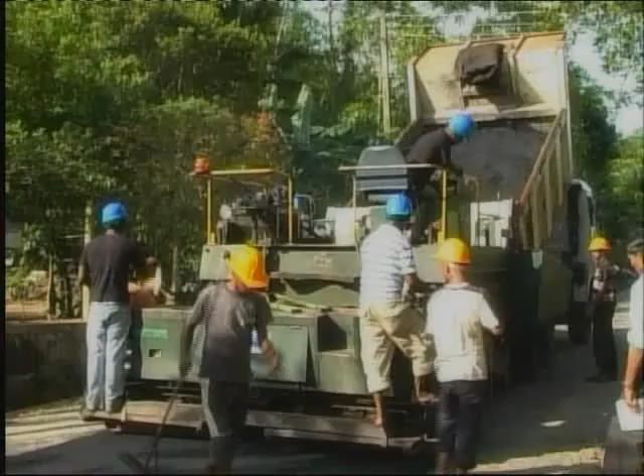KDA Weerasinghe and Company Private Limited is today one of the leading construction companies in Sri Lanka, having been in existence for over 20 years in the field of civil construction. We are a C1 category in the field of highways and have successfully completed several large road projects in Sri

Lanka. The project: construction of the road pavement of the Southern Transport Development Project, JBIC Section Package 2, Dodangoda to Kurundugahahetekma, from 54.52 kilometers to 66.44 kilometers. The client, Taisei Corporation. The consultant, Oriental Consultant Company Limited.

Cost. The estimated contract sum of the project was Rs 969 million. And at completion, the cost was Rs 1,041,680,844. Construction period. The original construction period was 15 months commencing from 26th December 2009 and ending 26th March 2011.

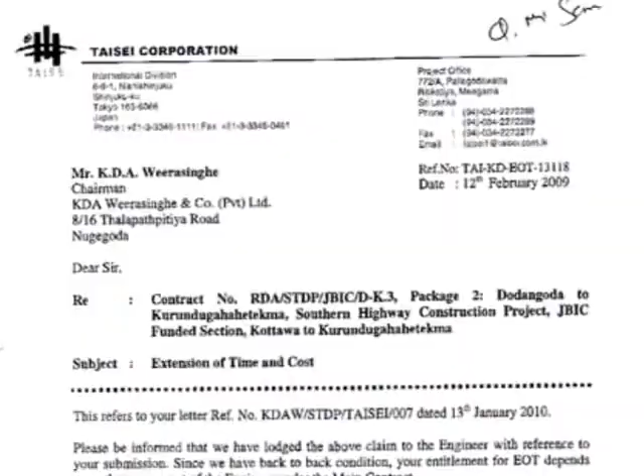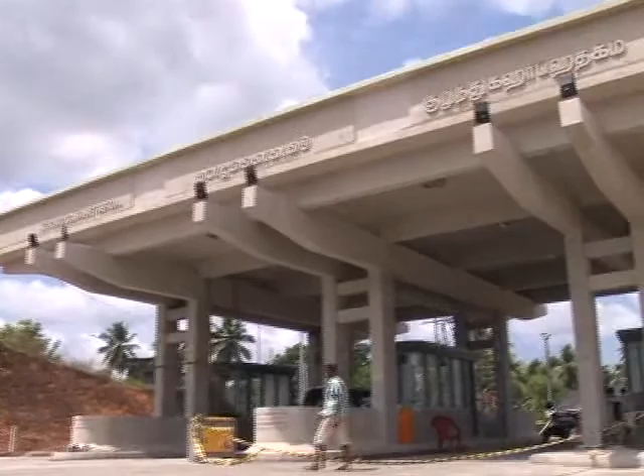However, with the additional work and approved time extensions, the project was completed on 17th September 2011. Pre-planning. Site location layout plan. The project was located from the bridge over the Benthara River to Kurundugaha interchange. The company was privileged to be the first domestic contractor invited by the main contractor, Messrs. Taisei Corporation, for the construction of the road pavement in the first expressway in Sri Lanka.

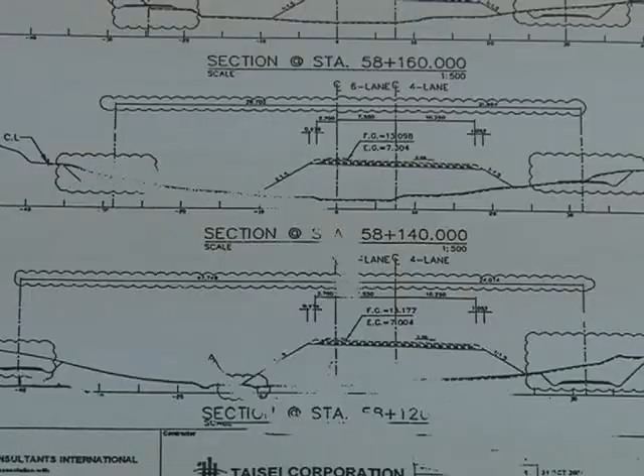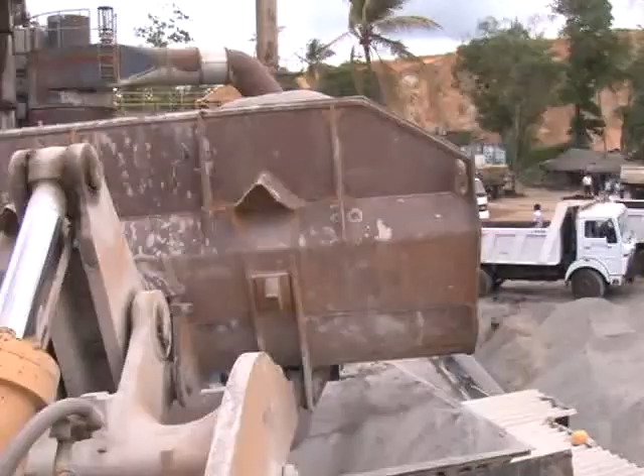Engagement of personnel. After receiving the letter of intent from the client, the project manager prepared a construction program and a resource schedule to implement this program with the assistance of relevant staff under the guidance of the general manager of the company. To implement that construction program, the company improved their existing crusher and asphalt plant located at Batapola and purchased some construction machinery and recruited the required human resources under the guidance of the chairman and managing director of the company.

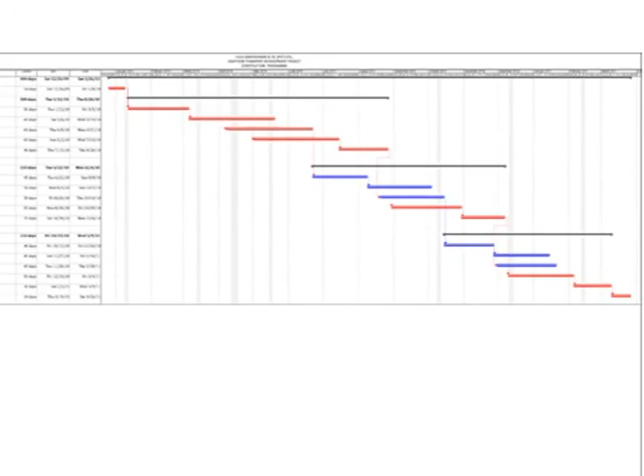Construction program. The construction program was prepared in order to meet the time targets. Planned activities were marked with milestones wherever applicable. Implementation. Site organization and management. The project was managed by a project manager with the assistance of an operation manager and a site manager. Qualified and experienced technical officers and experienced supervisors were deployed to assist the site engineers.

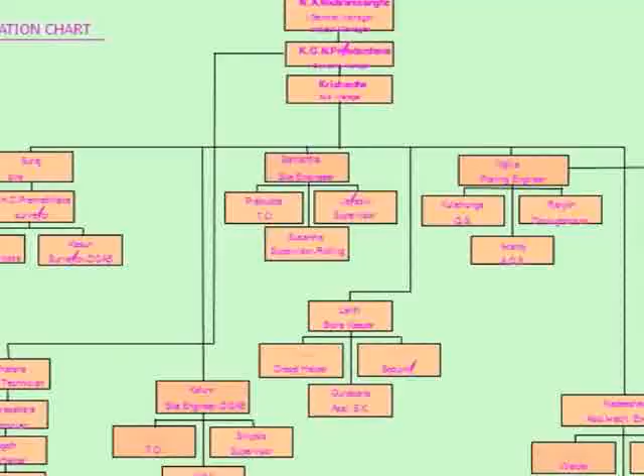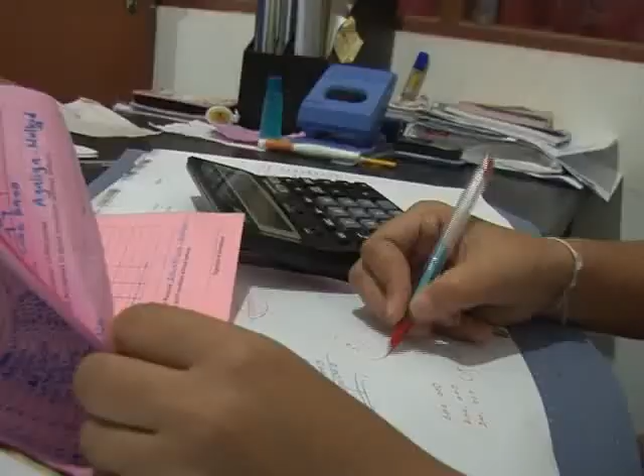The planning engineer was stationed at the site assisted by a quantity surveyor and a draftsman to carry out the planning and monitoring of the progress of the site, and to prepare the interim valuations, variations and extra work claims, subcontract bills, etc. Two experienced and highly skilled asphalt gangs of the company, headed by an experienced pavement engineer, were deployed to carry out asphalt laying works under the direct supervision of the operations manager of the project.

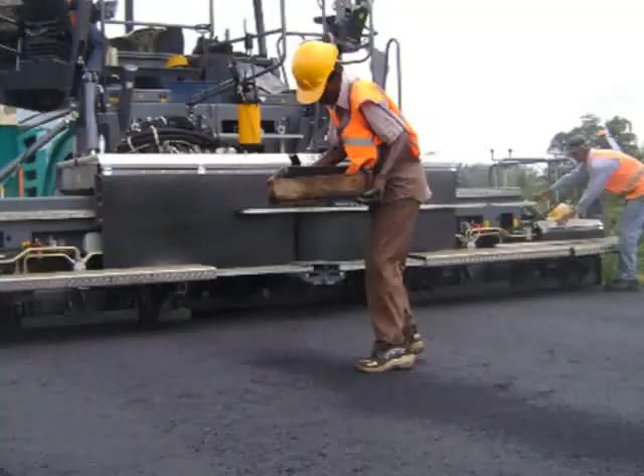Scope of works. The project comprised construction of approximately 12 kilometers of road pavement, 4-lane carriageway with hard shoulder, including construction of sub-base and base course using aggregate base course material, asphalt binder and wearing course. The design, construction specification and the level of quality assurance system were much more stringent than the road works we carried out in previous road contracts.

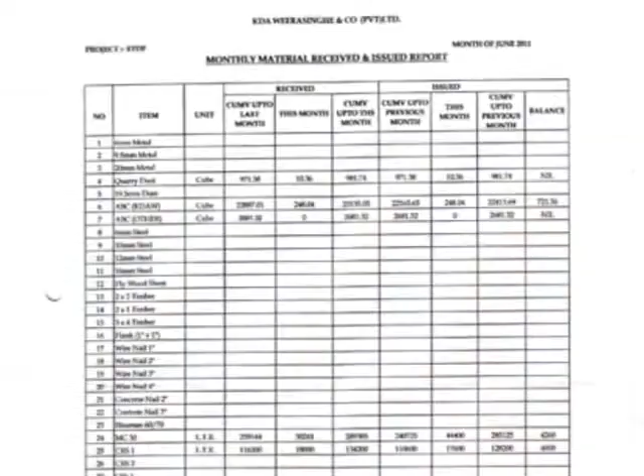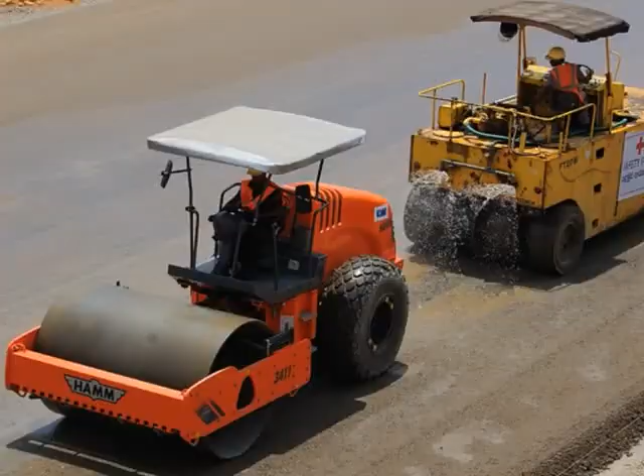After obtaining approval for the method statements by the employer, Messrs. Taisei Corporation, field trials were conducted as per the approval. After obtaining approval to proceed, construction commenced. At the completion of the project, 59,059 metric tons of asphalt and 126,738 cubic meters of ABC had been laid.

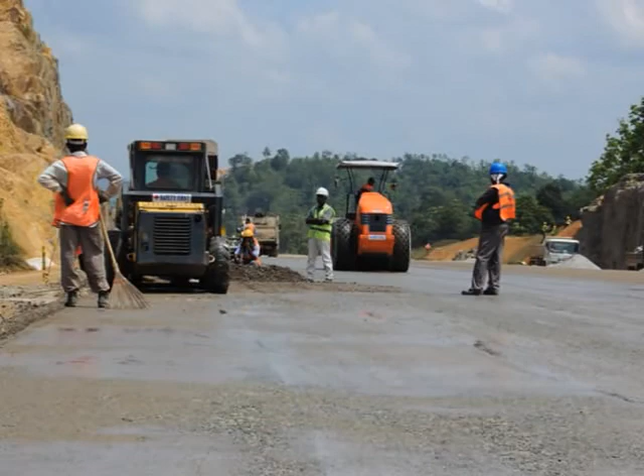Research and development. Laying of aggregate base course using asphalt paver in place of motor grader. The introduction of asphalt pavers with appropriate modifications in place of motor graders in the laying of aggregate base course ABC with speed and accuracy in the Southern Expressway, and the RDA has encouraged other contractors to adopt this method.

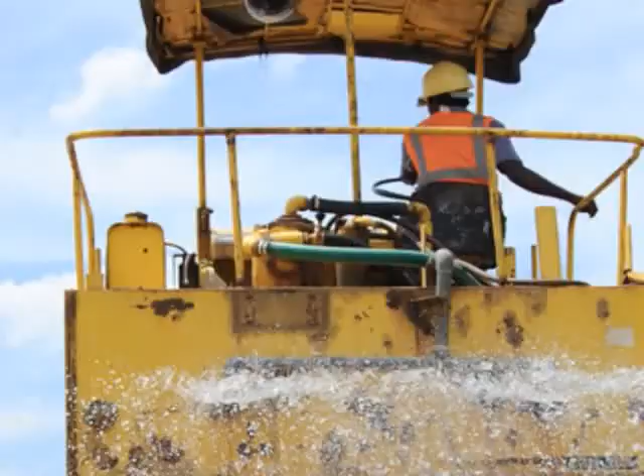Due to this improvement in methodology using a modified asphalt paver in laying aggregate base course ABC, with much improved evenness of the finished sub-base surface, the ABC material saving was 11% by volume.

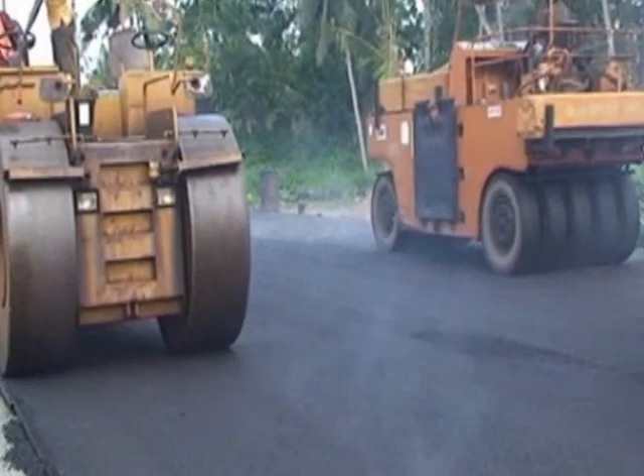Further, due to the evenness of the finished base course surface, saving of the binder course material was around 2% by mass.

The company has introduced the laying of 12-meter width asphalt layer using 2 asphalt pavers simultaneously. This technology was introduced and practiced for the first time in Sri Lanka at the Southern Expressway at the Southern

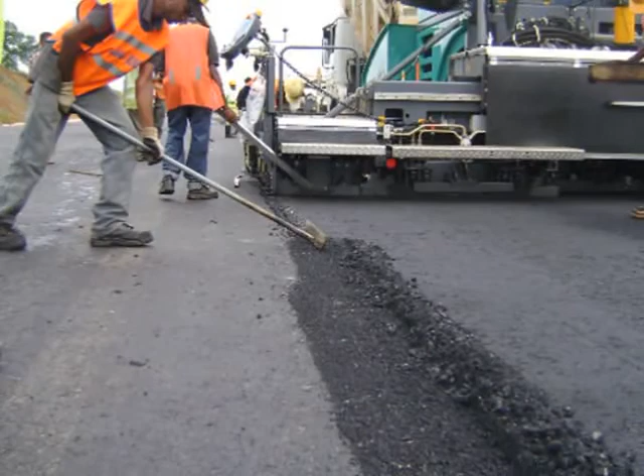Highway project. Major advantages of this method are: save time by 50%, avoid forming a cold joint, save time and cost for the rectification of the longitudinal cold joint, cost saving on plants and labor, minimize the material wastage.

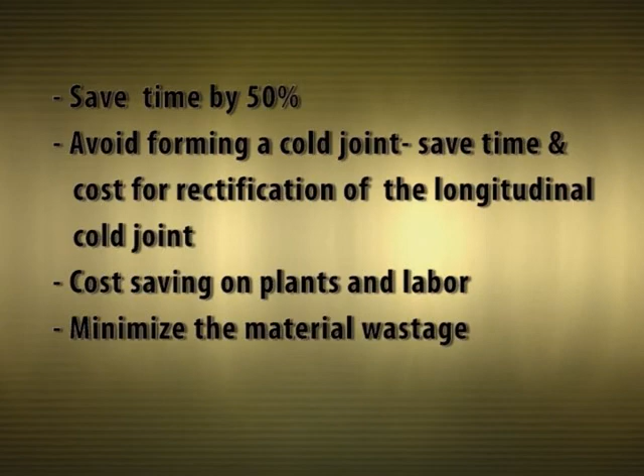Safety measures. Training programs for safety at site were carried out for the site personnel periodically to ensure strict adherence of safety requirements, and a dedicated officer closely monitored the health and safety activities at site.

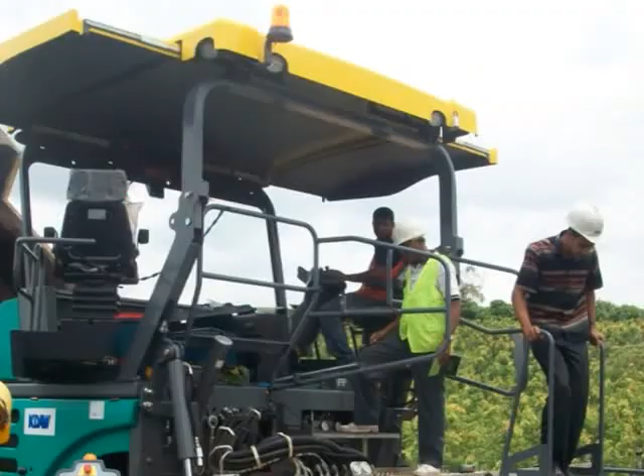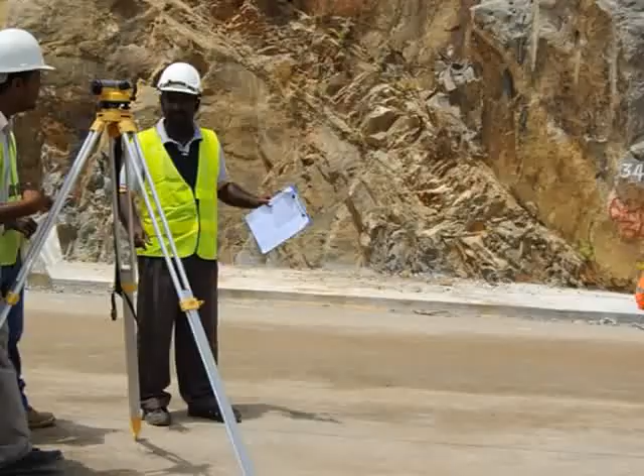All workers on site wore personal protective equipment or PPE, such as safety helmets, high visible clothes, luminous jackets, safety boots, gum boots, eye, head and respiratory protective equipment, and wet weather protective clothes if and when required.

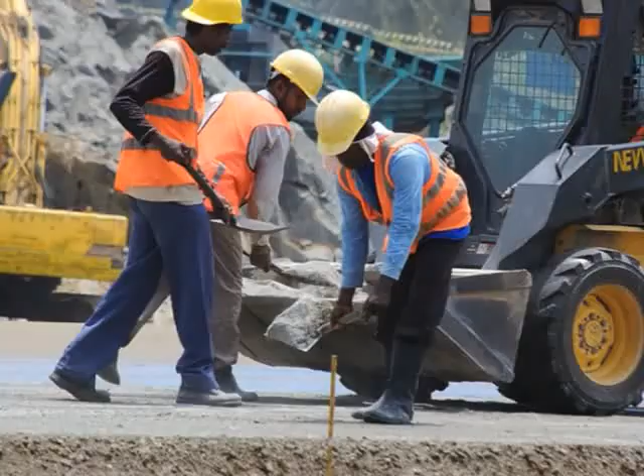Marking and covering of hazard area done systematically by providing, erecting and maintaining of all signs, warning lights, barriers, etc. Hazard identification on site.

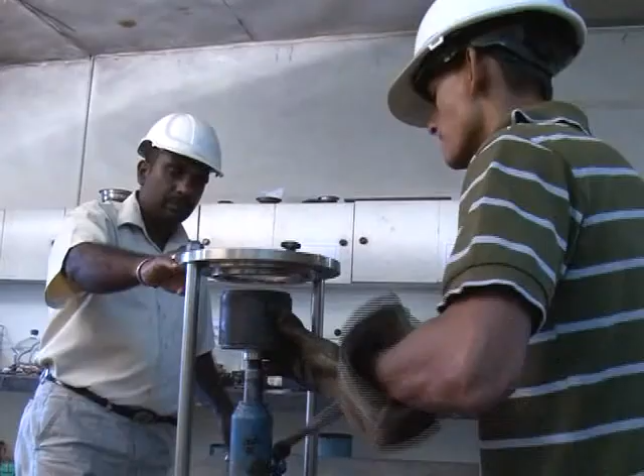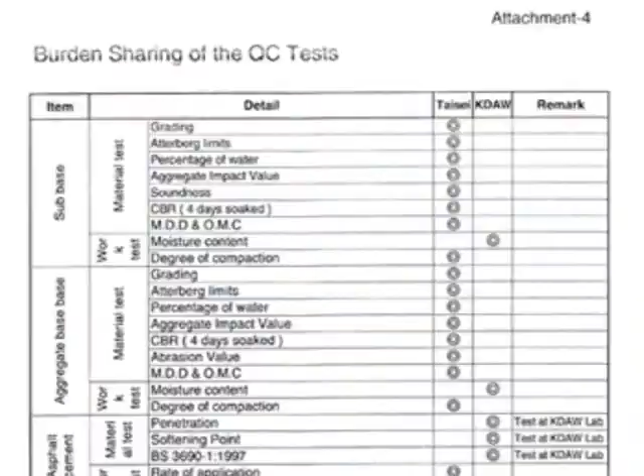Quality control. Since this was a quality assurance based contract, our project quality assurance in charge carried out the responsibility of maintaining, controlling and assuring quality. This was achieved by implementing quality control procedures and tests pertaining to sub-base construction, aggregate base course,

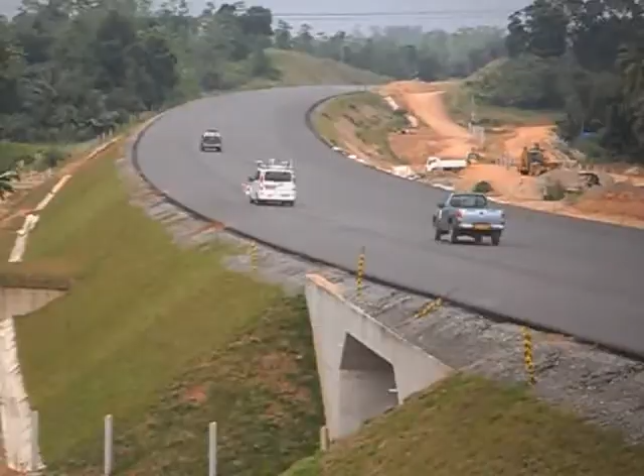bitumen, asphalt concrete. In addition to formal testing, we have carried out surface riding test for the first time in Sri Lanka at a Southern Transport Development project. Security arrangements. Security works was subcontracted to a reputed security firm.

Welfare facilities for workers. All workers and staff were provided with accommodation at the site as well as outside site in close proximity. Sanitary and washing facilities, safe drinking water, food and tea, cooking facilities, changing rooms, etc. were also provided. Cleanliness and waste disposal, environmental management.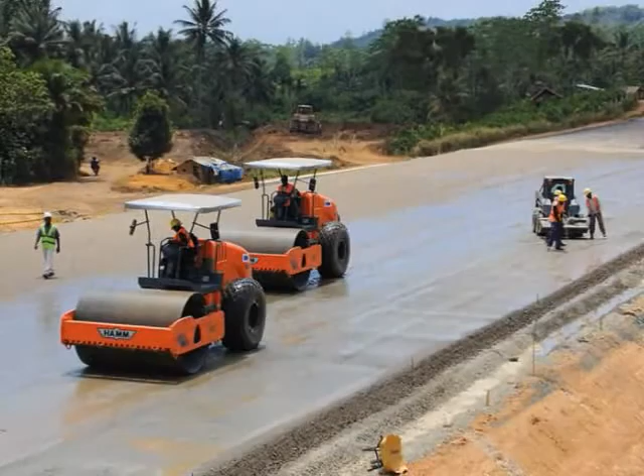All work was carried out in accordance with the Environmental Management Action Plan of the STDP. All engaged bodies of the STDP have adhered to this EMAP. All project staff was made aware of the measures which had to be taken to fulfill the project-specific environmental objectives.

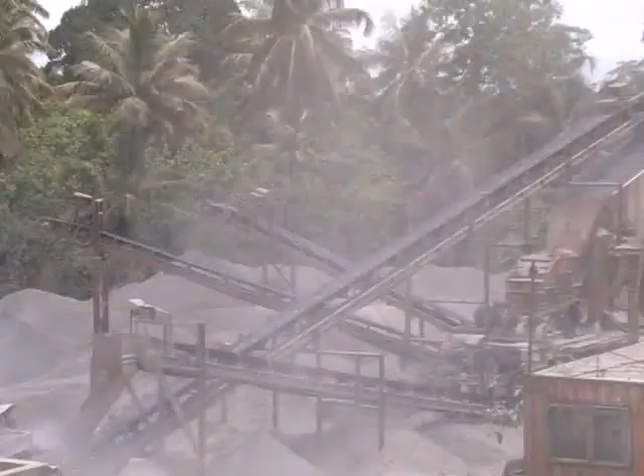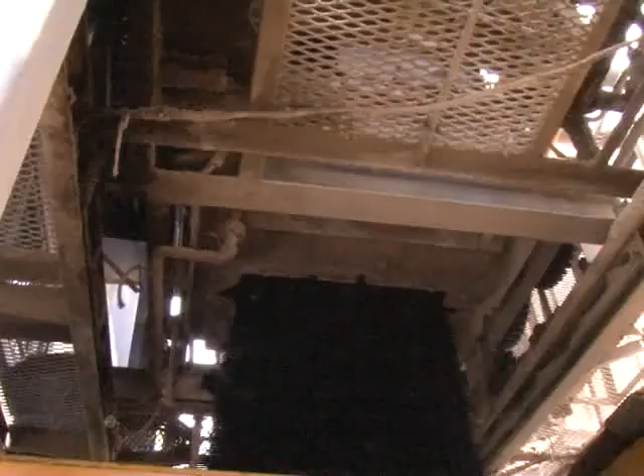Material handling. 100% of the metal requirement was produced by a company-owned crusher plant installed at Batapola in close proximity to the site with a total capacity of 80 cubic meters per hour. The total asphalt requirement for the project was met through an asphalt plant installed at the same location with a total capacity of 80 tons per hour. Monthly resources reconciliation was done too.

Progress and review management. Daily, weekly and monthly construction programs were followed, and the progress of entire construction activities was monitored by the project management and planning and monitoring division of the company separately.

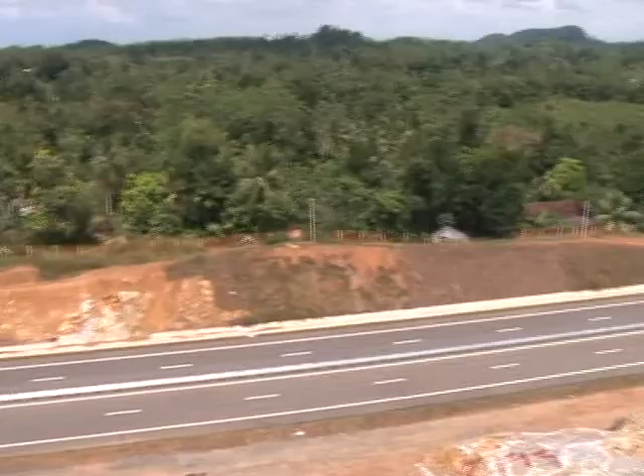As a result, we have substantially completed the project by 30th June 2011 and successfully completed the entire works including extra works by 17th September 2011. It is way ahead of the entire project completion date.

Maintenance of records. We maintain the required documentation and reports in accordance with our QMS. These included the site logbook, variation orders, day work sheet, etc.

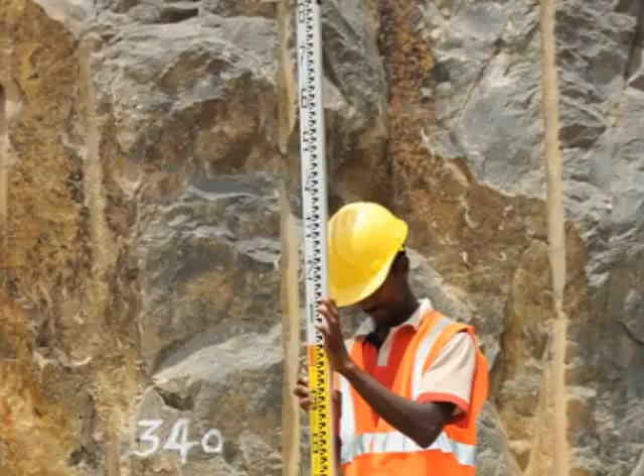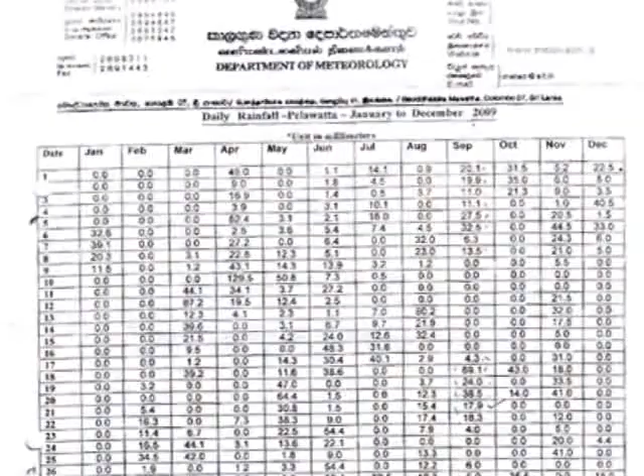Challenges. In this contract, the design, construction specification and level of quality assurance system were much more stringent than the roadworks we carried out in previous road contracts. It is the biggest challenge faced by the project team. Heavy rains which were beyond the acceptable weather patterns were also a challenge, and it resulted in delays.

The project has exemplified the ability of a local construction company and a local construction management team made up of solely Sri Lankan workforce to deliver such a high-quality development project.